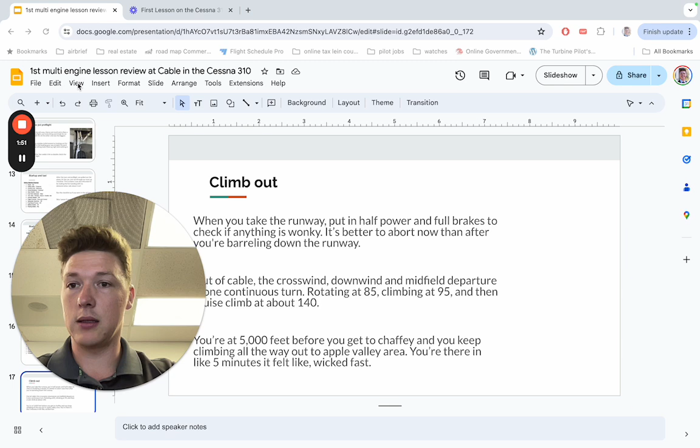Let's go and get into our multi-engine lesson. Let me go ahead and do this real quick. Bada bing, bada bang, yes I use Loom. There's my inside tip to you new CFIs and people who want to get into YouTube. Loom is awesome. Let's go slideshow. Probably want to go all the way to the back. Here we go, alright let's talk about it.

So this lesson, this is the first multi-engine lesson review at Cable in the Cessna 310. I just want to clarify, I'm not an MEI. This information should be cross-checked and not relied on. This video is for me to pass my check ride and to have a go-to reference video during my training.

So the timeline, what did we do during the first lesson? I met with Connor. I've met him before, he helped me with my CFI in various parts of my training prior. We knocked out documents, he shared the training materials, and we briefed the flight and the maneuvers and procedures we'd be hitting during the first day.

We had a Cessna 310 tour, learning all those new switches and extra new stuff. Learned how to pre-flight the airplane, did a run-up, took the runway and headed for the Apple Valley area. Did slow flight, steep turns, power on and power off stalls, simulated engine failure. Ran the ILS to 26 right at Chino, did a few touch and goes and learned checklist procedures. Came back to Cable, fueled up and debriefed.

So let's talk about each one of those points. The MEI, Connor, he's awesome. I'm a little bit biased because he was my instructor before, and we both went to Ayala High School. He graduated 2017, I graduated 2016. I didn't know him in high school, but that was cool, small world kind of thing.

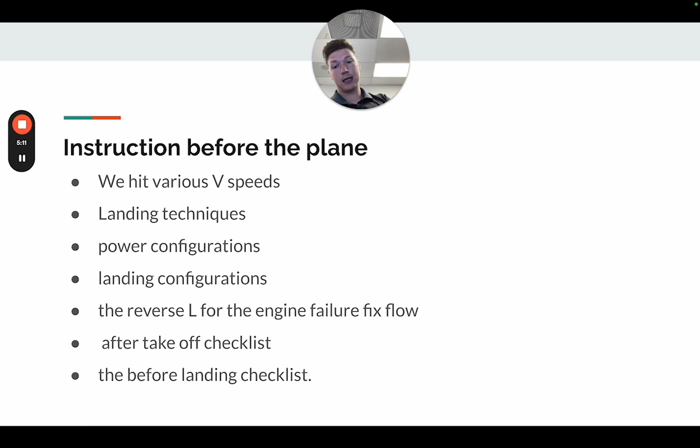Instruction before the plane. There's a sweet little office in his hangar where we brief the flight before and debrief after. So we hit various V speeds that are important, landing techniques, power configurations, landing configurations, the reverse L for the engine failure fix flow, the after takeoff checklist, and the before landing checklist.

Okay, so commit this to memory. The Cessna 310 V speeds important for your first lesson: VA is 140 miles per hour, VR rotation speed is 85 miles per hour, VX is 95 miles per hour, and VY is 121 miles per hour. Cruise climb is going to be between 130 and 140.

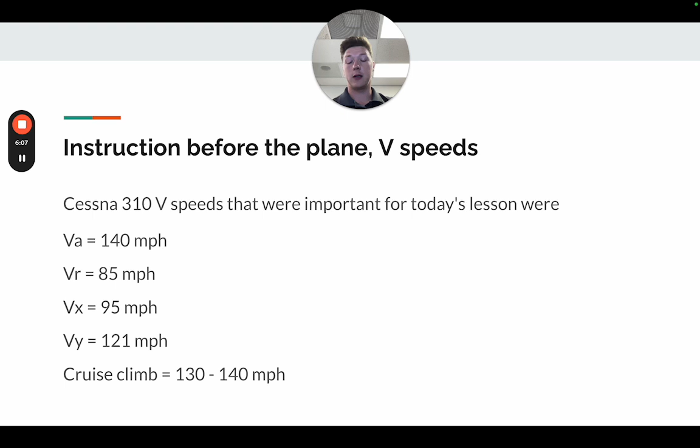A couple other important V speeds I learned from today's lesson: 109 is blue line, and then - what was that? Yeah, 80 or 85, don't quote me, I needed to study my stuff better. But when you do a VMC demonstration, you slow the airplane down, one engine, pull back for 80 - don't quote me on that, I'm going to go back and check that later. We didn't do a VMC demonstration when I was making this presentation.

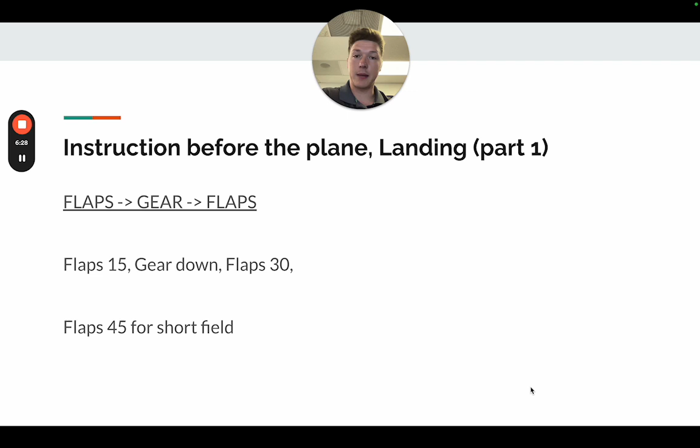Instructions before the plane. Landing, part 1: flaps, gear, flaps. Flaps 15, gear down, flaps 30, and then flaps 45 for short field, and prop full forward on final. That's what's in your checklist, but flaps, gear, flaps is the typical way to go about it.

Instructions before the plane. Reverse L for the engine failure fix flow. When I was making this presentation there were a lot of new buttons, so I had to figure these out: boost pumps on, mags check, alternate air, fuel selector, crossfeed. So when we have a fixed flow, an engine failure fixed flow, we check that our boost pumps are on - there's these new buttons called boost pumps, turn them on.

Then you go over to the red knobs, check that the mags are on. After you've checked those two, you go down to alternate air - it's below the rudder trim, or the aileron trim. These two little white things you pull, make sure those are on for the dead engine. Fuel selector, crossfeed - this is after an engine failure, this is how you would try and fix it. Crossfeed: if the left engine is dead, switch the left tank to the right tank. This is why I make a presentation, because there's a whole lot of switches you gotta get used to.

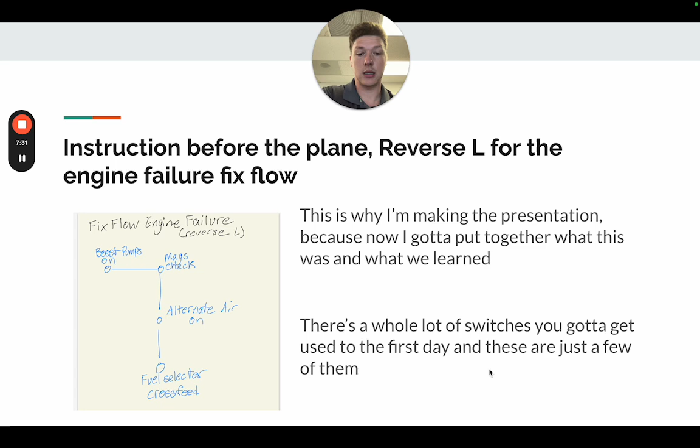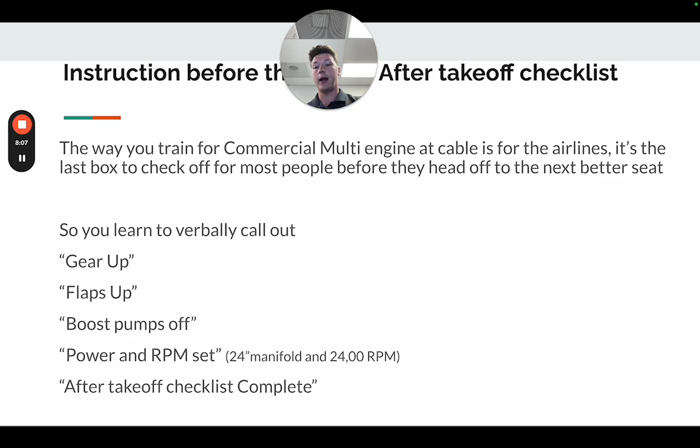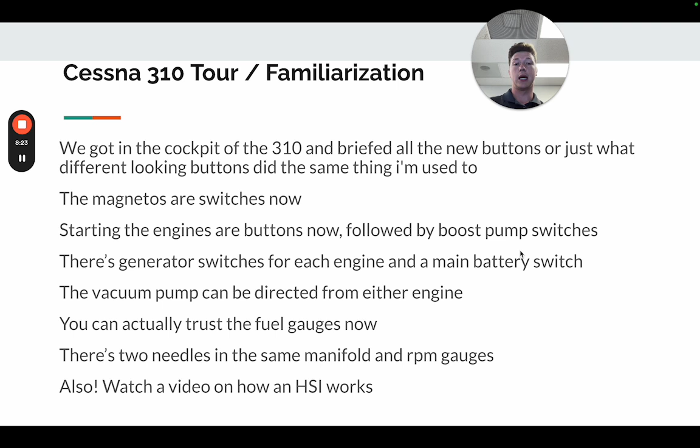Getting familiar with the Cessna 310. We got in the cockpit first, briefed all the new buttons, or just what different looking buttons did the same thing that I'm used to, like magnetos for example. In your Cessna 172 you just check your magnetos with your key - with this, they're whole switches now.

Starting the engines is with buttons now, followed by the boost pump switches. So you prime it with boost pumps, depress the engine start, and then boost pumps back on. There's a generator switch for each engine and the main battery switch. The vacuum pumps can be directed from either engine. You can actually trust the fuel gauges now - I thought that was wild.

There's 2 needles in the same manifold and RPM gauges. That was kind of cool to see, because you're finally flying a multi-engine - there's 2 needles inside of both the RPM and the manifold pressure gauges.

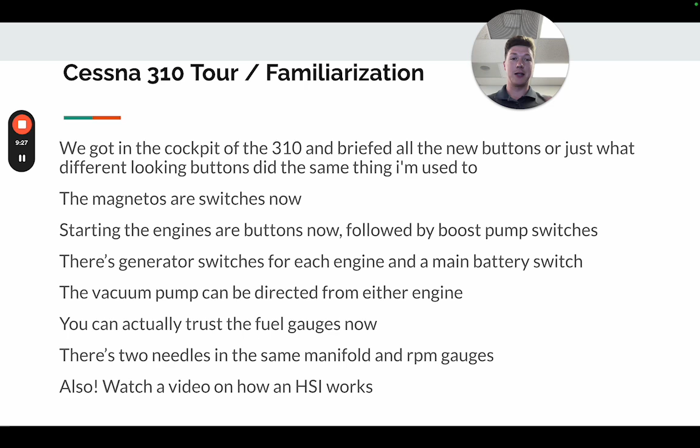Also watch a video on how the HSI worked. Thank goodness I was getting ready for my CFII before getting into this, and I briefed a little bit of HSI stuff, because it kind of blew me away when I first saw the HSI. That thing, you gotta just watch a video on that on the side - I'm not going to explain it here.

All right, Cessna 310 pre-flight. How's it work? Well, it's not too different from your regular pre-flight that you're used to.

So, breathe easy because it's not much extra than the 172. Just everything you'd look for on one engine, look for on the other was the biggest difference. I already had a complex endorsement, so looking out for the extra stuff in the landing gear was pretty straightforward. Make sure everything's locked correctly, no extra oil leaks, that sort of stuff.

Make sure everything looks lined up right and nothing is loose. There's an AD for the rudder trim, so double check that the arm on that is tight.

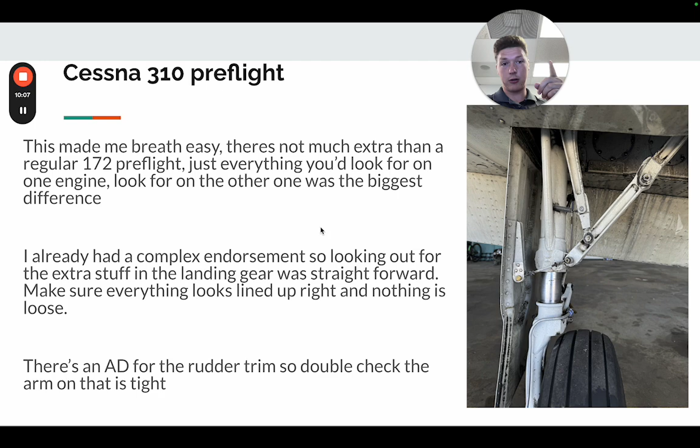All right, start up and taxi. So after the tour and the pre-flight, we pulled out the airplane and we hit the can. Had to put that in there, right? Make sure you go pee before you go fly.

And ran through our startup checklist. This is where I also was informed I'd be making the first landing with no demonstration. Talk about trust. Landing in this airplane is pretty intimidating. I think I actually put this in this presentation a little later, but your nose is like going for the ground. I'm not used to that sight picture in the 172.

Okay, so run the checklist as if you were in the airline. You can skip this part of the video, probably about 10 to 15, 20 seconds, or pause if you just want to read it yourself. I'm going to run through it from my own memory.

Before starting engines checklist: seats, set. Safety belts, fastened. Control lock, removed. Circuit breakers, checked. Gear switch, down. Fuel tank selectors, main. Trim tabs, elevator, aileron, rudder, set. Avionics master, off. Flight controls, free and correct. Generator switches, off. Fuel boost pumps, off. Battery switch, on. Parking brake, set. Before starting engines checklist complete.

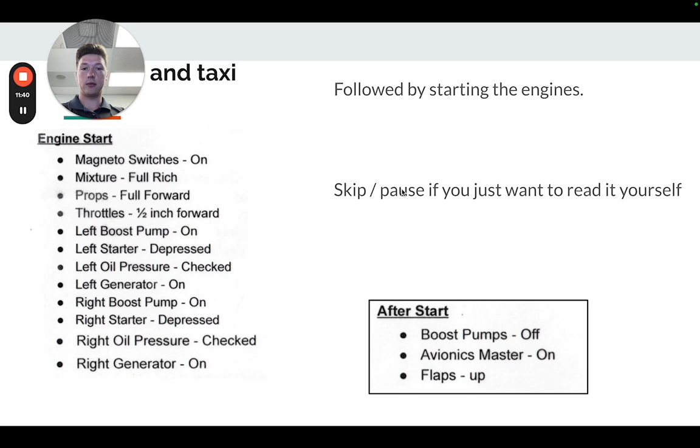So that's how you run that. All right, so I'm going to do this. Oh no, what happened here? There we go. Okay, so followed by the starting engines checklist.

Skip again or pause if you want to read it yourself. Engine start checklist: Magneto switches, on. Mixture, full rich. Props, full forward. Throttle, half-inch forward. So for this, you'd actually go for the first click, you'll feel it when you get into the airplane. Left boost pump, on. You flick that switch. Left starter, depress. That's a button. It'll start to catch. Left oil pressure, checked. Left generator, on. Right boost pump, on. Right starter, depressed. Right oil pressure, checked. Right generator, on. Engine start checklist complete.

Now the next checklist. After start checklist: boost pumps off, avionics master on, flaps up. After start checklist complete.

All right, so this video would be incomplete if I didn't at least mention that you can't taxi a multi-engine aircraft on just one engine. Both of them have to be working, otherwise you got too much pull on one side than the other. You gotta get a car or a cart or something to pull you back to the hangar, at least if both engines are off the side and not in line. Like if you had a front engine and a back engine in line, that would work. But these are on the side of the aircraft on the wings.

To hold center line, imagine a line from your heart to your knee, and that line in your head is over the center line. My instructor didn't say this, it's just what I witnessed when he said I was over center line. Sight picture is definitely a little different, you're sitting a little higher than a 172, so you got to get used to it. That was the image that I had in my head.

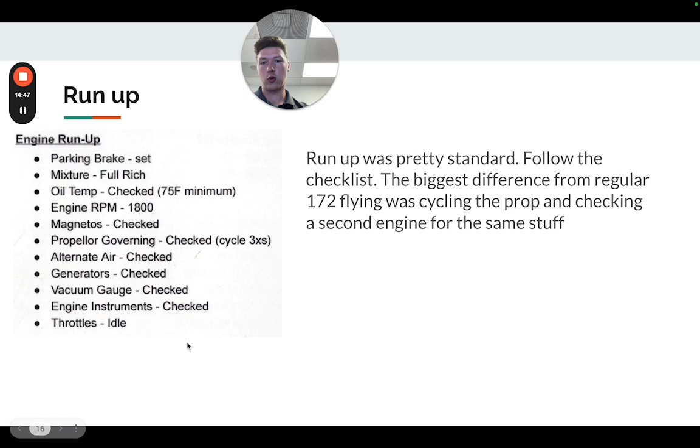Throttle, idle, full back. Cool. Climb out. So we've taken the runway, we're climbing out. When you take the runway, you put half power and full brakes to check if anything's wonky.

It's better to abort the takeoff now than after you're barreling down the runway. This takes a little getting used to because you're used to a 172 with one engine, so you're not worried about anything messing up. You only can rely on that one engine. But with two engines, there's twice the risk.

So you want to make sure they're both working. Out of Cable, the crosswind, downwind, and midfield departure is one continuous turn, rotating at 85, climbing at 95, and then cruise climb at about 140 out of there.

So for takeoff, I'm going to mention this real quick because I got a better understanding of how the takeoff checklist works today. When taking off in the 310, you're going to brake, half power, release, full power, rotate at 85, positive climb, positive rate. So once you get positive rate after 85, then gears go up. It's very important you get the positive rate first, then gears go up.

Pitching for 95, power setting 24, you're just getting in the ballpark. You don't want to get too anal about getting it dead nuts on. And then flaps, check, and then you do after-takeoff checklist, and then you go into that. I'll talk about that in a minute because it is your landing, flaps, power, boost pumps off, after takeoff checklist complete. Okay, so you're at 5,000 feet.

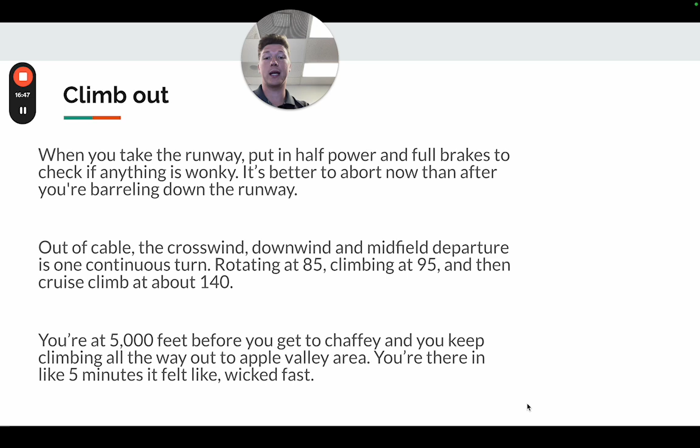Before you know it, you get to probably about over Chaffey, and you keep climbing all the way out to the Apple Valley area. You're there in about 5 minutes. It felt wicked fast. All right, so we started with the slow flight.

Biggest surprise here was that bringing in the first 15 degrees of flaps, there is an extreme amount of lift. You do this in 3 increments to get down to 15 degrees of flaps. For your benefit, chair fly this with me, or pause, or skip.

So for slow flight, how are you going to do this? Procedure: flaps 1, 2, 3, flaps are at 15. Gear down, pull out, push down. Flaps 30, hold all the way down to 30. While maintaining altitude, pitch up for the first indication of a stall.

So 80, stall horn, or buffeting. Establish slow flight just above the speed at the first indication of stall, so -0 +5. Once prompted to recover, add power and pitch to maintain altitude. Full forward, flaps 15, gear up, flaps up. Okay, so that's from 30 to 15, so power, 15, gear, 0.

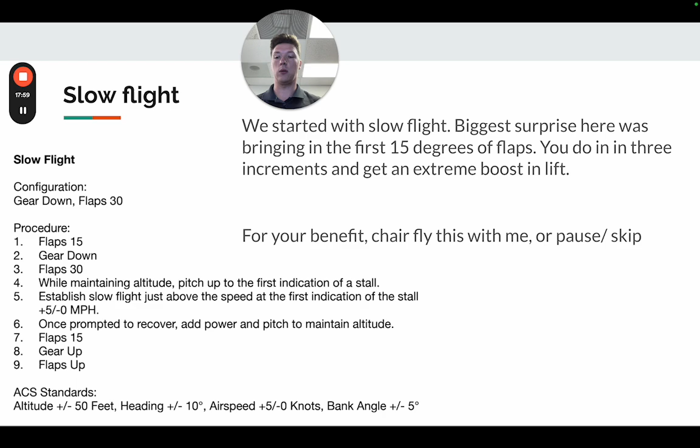Cool, there we go. All right, and for steep turns, this threw me off because I thought with more power you didn't need to introduce much more elevator, but I was wrong. It's very similar to a steep turn in a 172. You're just hauling ass when VA is 140.

So for steep turns, up to commercial standards, you're going to be banking to 50 degrees. I'm not going to say what this thing is because I did it again today. What you do is clear, call, configure: clear the area, call for you're doing this maneuver, configure. So we did 7,500 at about 140 knots.

And then you get into a right turn. As you're getting into that right turn, go ahead and push in that power just a tad, just enough to maintain speed. Then start pulling back, get completely into that 50-degree bank and start to pull. Then you do your whole maneuver, and at 30 degrees, 20 degrees before rollout, start rolling out, and push down because you get that extra lift, pull that power back. That's how you do a steep turn.

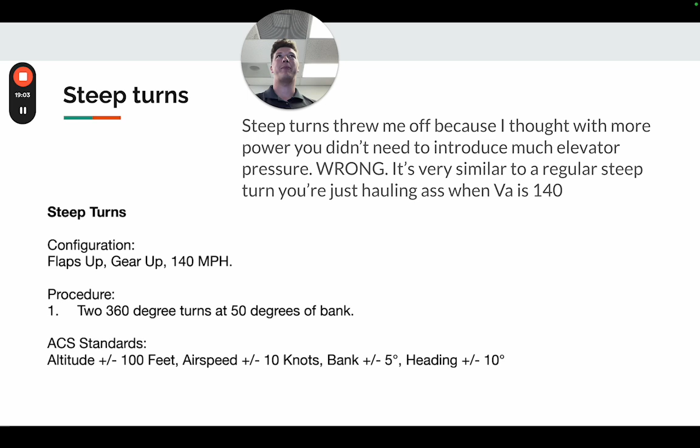Pretty standard. All right, power off stall. The biggest thing about the power off stall is to get into a landing configuration. I've never landed it before, so I was just assuming some similar stuff. After I learned: prop full forward for all maneuvers unless you have to feather, and RPMs at 17.

So let's walk through this one with me, we're going to chair fly. So power off stall, 7,500, choose your heading. Power off stall: first flaps 15, 1, 2, 3. You literally grab the little flap thing and you go boom, boom, boom.

Thanks for sticking with me, guys. All right, then you go gear down, flaps 30, establish a 500 feet per minute descent, power idle, pitch up for first indication of a stall because it's a commercial maneuver, right? Recover: smoothly reduce angle of attack, full power, flaps 15, positive rate, gear up, VX 95, flaps up, establish a climb.

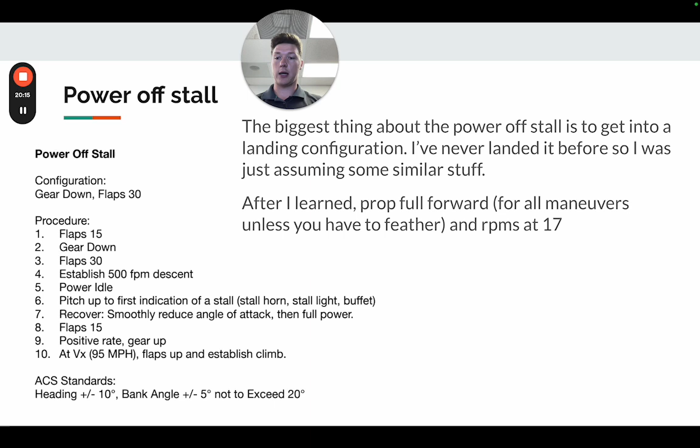So pretty similar to how you would do in a 172, you just run through that. All right, cool. The best part about the power on stall is, since it's a commercial check ride, you only need to bring it to the airplane's first indication of a stall.

Let's chair fly this again. So the procedure, we're at 7,500. We've chosen our outside visual reference point, clear call configure, all that jazz. Reduce power to 15 inches of manifold pressure, slow to 100 miles per hour, increase power to 20 manifold pressure,

Pitch up to first indication of a stall. So flying 120, slow to 100 miles per hour, flaps, manifold pressure, bring it in, and then pitch up to reduce first indication of stall. Recover, smoothly reduce the angle of attack. I want to emphasize that it's a smooth reduction of the angle of attack. Then full power, accelerate and climb at 95.

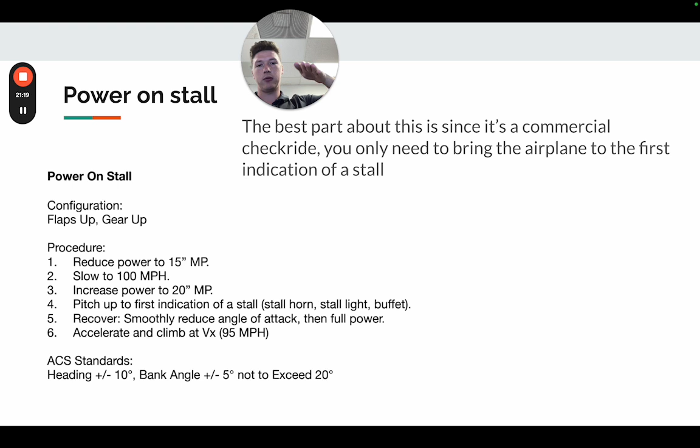So it's pretty similar to pitch, power, roll, climb. That's what you want to do. You want to pitch the airplane down, roll the wings level. Wait, no, I'm sorry. Pitch, power, roll, level, climb. Get away from the ground.

All right, essentially accelerated stall. So this is another thing we did on the first day. It was a busy first day. Essentially a steep turn where you're yanking back. So you get into a 45-degree bank, pull back, hear the stall horn, reduce the angle of attack, full power, rudder to level the wings.

This was important. It was a little different from the 172 because there's a lot more torque. And then climb away at 95. Remember, rudder.

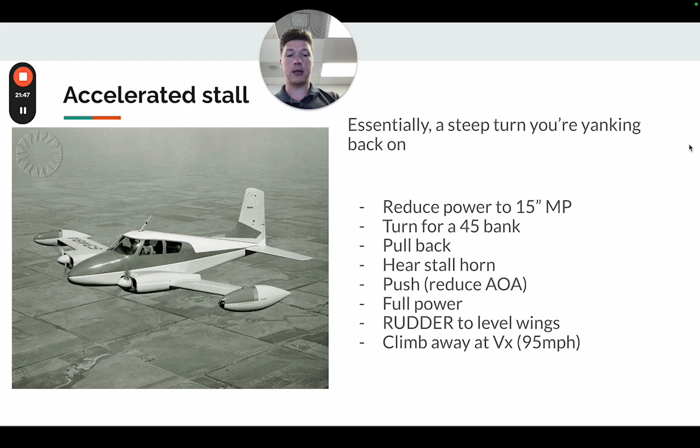Okay, there we go. All right, simulated engine failure. The first simulated engine failure of a multi-engine. We didn't dive into this one too deep, other than feeling out what a dead engine felt like. So that was cool. Engine shutdown: throttle idle, mixture idle cutoff, prop feather, fuel boost pumps off, magnetos off, generator off. And then you want to dead foot, dead engine, then verify with throttle, follow the checklist.

So today in my lesson, I really wanted to just verify. I didn't do gears or flaps or any of the other stuff that you're supposed to do prior. So just know that there's more than just this when you get into training.

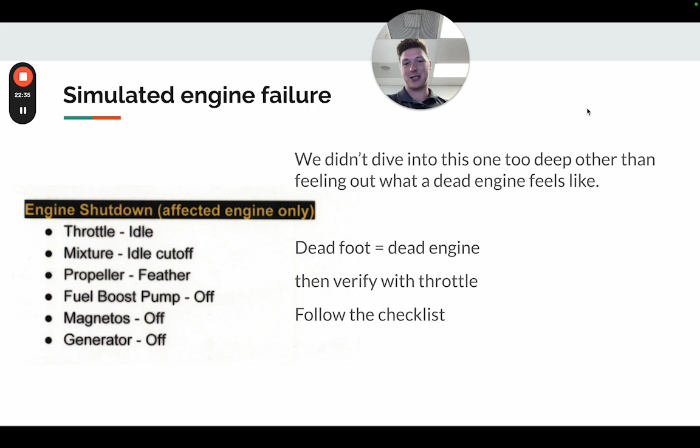And then we did the ILS 26 right into Chino. So before heading down to Chino, because we were at 7,500 out in Apple Valley, we had to get down to 3,500 to get into Chino. 4,400, there you go. So we had to drop a lot of altitude. We put in 15 degrees of flaps to help us get down through the pass and to get to the correct approach altitude. So since you're flying really fast in a multi-engine, you can use flaps to make you drop as well.

We asked for a VFR practice approach. I accidentally asked for an IFR practice approach. Make sure you're proficient in your radios.

Anyways, briefing the localizer frequency, approach course, verify the plate, and final approach fix, altitude, and minimums were the important part of the briefing plate. He is not concerned that you can do a complete plate brief because this is not an IFR check ride. This is a multi-engine check ride. They just need to make sure your skills are there.

So, 26, the HSI - I'm not going to go too far into it, so bear with me. The HSI acts like a heading indicator. It spins as you turn the airplane. Just as you would in your regular 172, that heading indicator turns. But to turn it, to match it to the magnetic compass, you would push in on this little guy over here and turn, kind of like with your heading indicator in your 172.

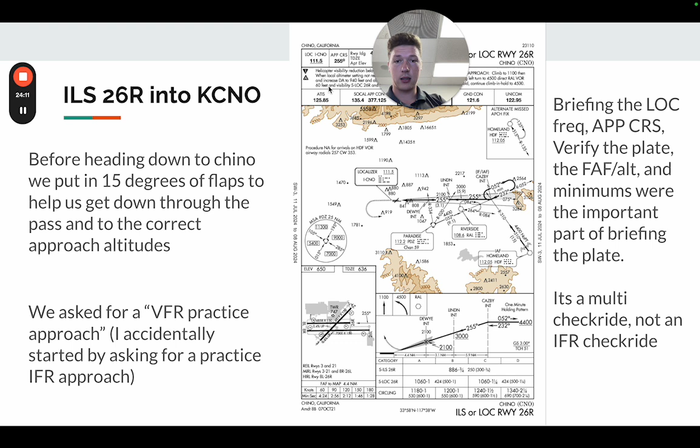And then the course selector knob turns the course pointer. That's what you got to line up with your approach course. So this guy, when you brief the plate, what was that? 255. You'd line this up to 255, and that would be your course that you're trying to get onto, wherever it may be around your compass. Line your GPS leading line with the purple needle, and then readjust the course selector, and you've corrected for wind.

So you have your, I think it's a 430. It's one of the, I should have put that in here. Anyways, it's a touchscreen one. And you line that up with the purple needle, your nose dash line. Once those two are lined up, reset your course, and you've corrected for wind.

Okay, cool. There's a glide slope indicator. Capture the glide slope, hold 100 miles per hour on the way down. So over here, there was a glide slope indicator. It caught the other day. It didn't catch today, so we had to use localizer minimums.

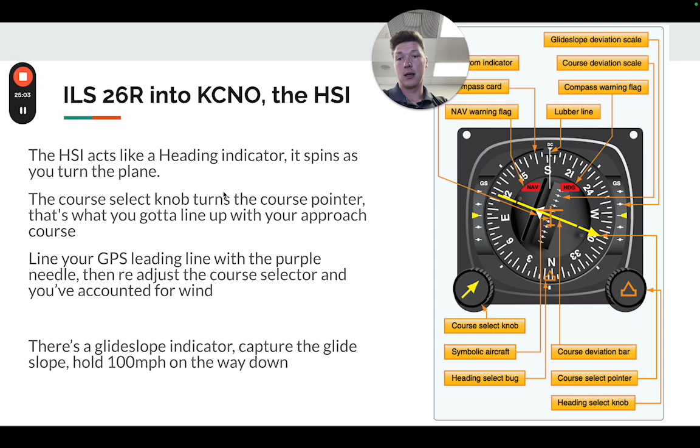All right, cool. Landing at Chino. Wild. This thing goes, boy.

So turns in the multi-engine got to be authoritative, up to 30-degree banks. I think this is just because I was a little intimidated, never being in a multi-engine before. You're going really fast, and I didn't want to do anything too drastic, but no - you fly the plane, turn it 30 degrees, dude. You want to turn, turn.

All right, sight picture is going to be intimidating too. Nose down to the numbers the whole time till flare. So yeah, it feels like you're diving towards the ground.

Cool, landings at Chino. I'm just going to read out the red part here for us. If you want to skip, go ahead and skip. This is for both of our education.

Configuration: gear down, flaps 30. Once you're in the downwind, you want to do your GUMPS checklist. Gear down, gas - so boost pumps, fuel selector, mixture. No, mixture is the M. I need to do better at this. U is undercarriage, gear down. M is manifold pressure? No, shoot - mixture, like I just said. Mixture full rich. P is props full forward on final.

So you're not going to move the blue knobs forward until you're on final approach. Let's talk through the procedure: approach the downwind, select flaps 15, maintain 120 knots. So way before you even get to the pattern, your flaps are already at 15 and you're shooting for about 120 knots. Gear down before landing checklist.

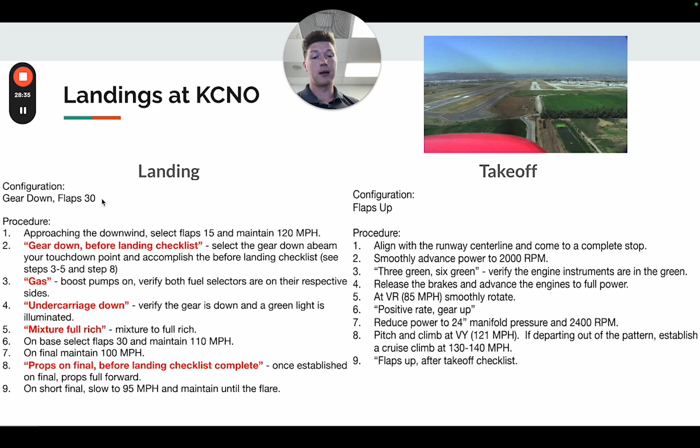Release the brake and advance the engines to full power. At VR, 85 miles per hour, rotate smoothly. Positive rate, gear up. Reduce the power to 24 inches of manifold pressure and then 2,400 RPM. Pitch and climb at VY, 121 miles per hour. If departing out of the pattern, establish a cruise climb at 130 to 140 miles per hour. Flaps up, after takeoff checklist complete.

All right, we're almost done guys. Landing at Cable - like I said a couple slides ago, the sight picture is intimidating, much more so at Cable. It's a little smaller runway, you feel very low on final into Cable. Flaps 15, because it's a short field as well, so you want to make sure you hit your point.

All right, debrief. These are just the notes that we talked about for my personal flight afterwards, like planes put away, we go back to the office. Flaps 15 anytime getting into the airport - so like any airport environment, make sure flaps are 15.

Relax on the ailerons in slow flight - so yeah, use more rudder, not so much ailerons. I guess that day I did some more. Be smooth but assertive on the power, so don't be timid, use your power. Steep turns still need a little extra power in the turn, so yeah, I learned that that day.

So these are the notes that I took afterwards: the 26 left ILS, intercept the glide slope, gear down before landing checklist, GUMPS at the end, flaps 20, accelerated stall, use more rudder not ailerons, engine failure procedure.

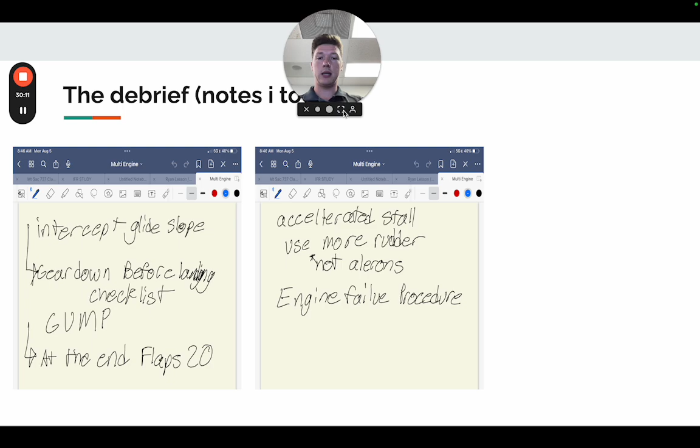Okay cool, so that was my first day of multi-engine training. I hope this video helps you get ready for your first day of multi-engine training.